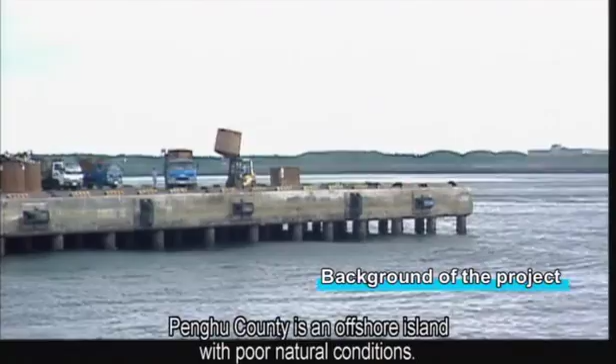Penghu County is an offshore island with poor natural conditions. The lack of natural water resources affects the sourcing of city water, resulting in livelihood water source deficiency, which causes inconvenience in the daily lives of Penghu residents.

Penghu has a flat terrain that lacks rivers and mountains, and a climate model in which annual precipitation is far lower than the amount of total evaporation. Reservoirs have a small watershed and a short rainwater collection time. In a dry year that lacks plentiful rainfall, reservoirs run low with insufficient water storage, and water shortages are likely to occur.

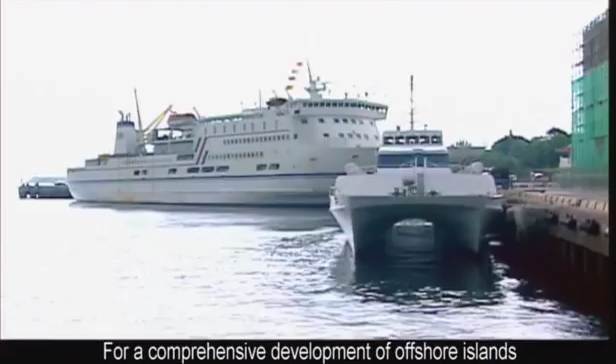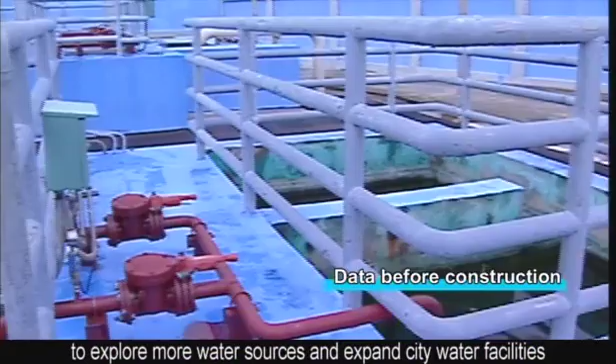For a comprehensive development of offshore islands aiming to improve water quality for residents' daily use, as well as for corresponding to the increase of water demand resulting from tourism developments, it was a priority mission for the Taiwan Water Corporation to explore more water sources and expand city water facilities to provide an adequate supply of quality city water when the original facilities are at full capacity for both water production and water distribution.

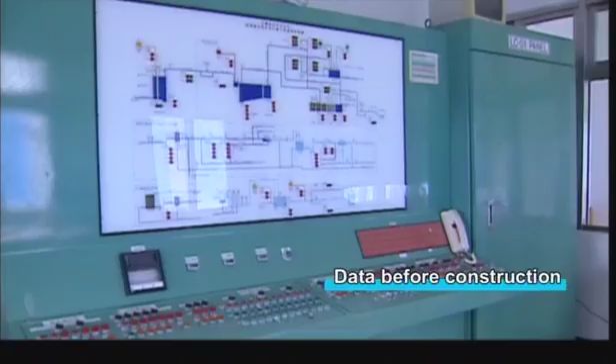Desalination plants have become an emerging water resource, equally important to traditional water sources in many developed coastal countries, offering an effective solution to mitigate or eliminate the unbalanced supply and demand.

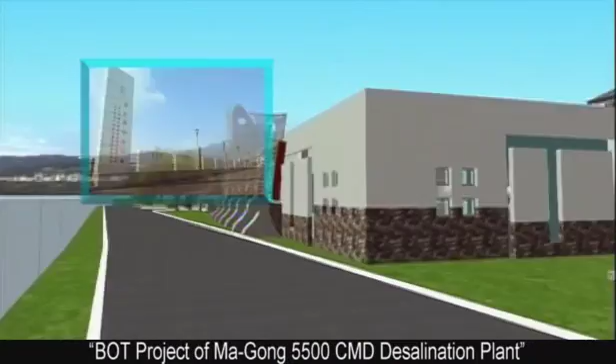In order to resolve the present insufficient water supply in the Penghu area, the Taiwan Water Corporation decided to build the BOT project of Magong 5,500 CMD desalination plant to stabilize the water supply by way of desalination, increasing the amount of clean water and capability to regulate the supply corresponding to quality fluctuations in the source water.

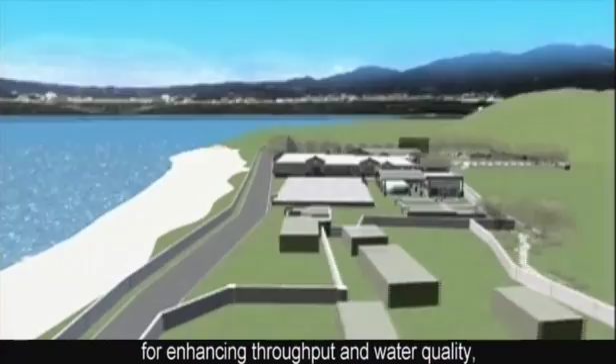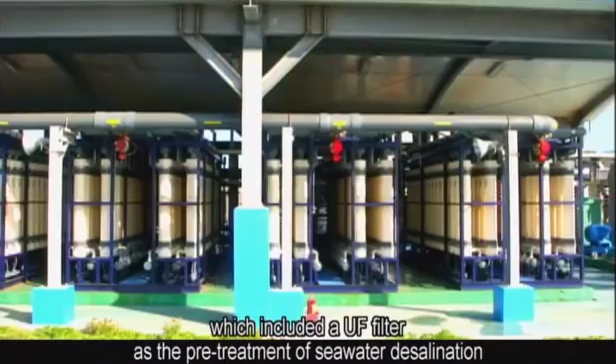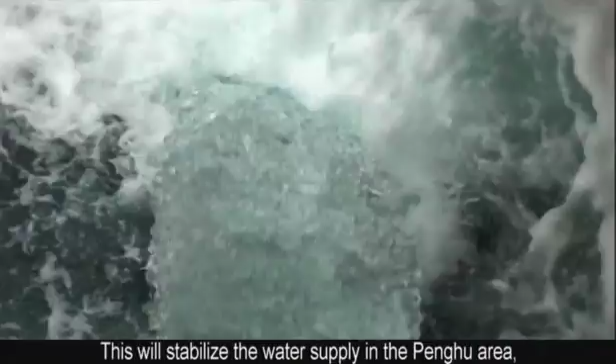Putting aside cost considerations, for enhancing throughput and water quality, Chinfu Water Resource Company Limited, a participant of the project, selected one of the first-class desalination systems in the world, which included a UF filter as the pre-treatment of seawater desalination, thus offering a steady yield. This will stabilize the water supply in the Penghu area, providing a safety standby load and achieving smooth deployment of the source water in the area as well.

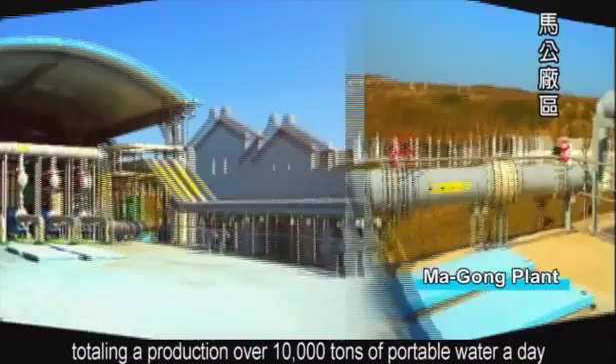Located at Magong City of Penghu County, the project covered both the Magong plant and Wangan plant. A new 5,500 CMD system was constructed at the Magong plant, together with the refurbishment of a 7,000 CMD system, totaling a production of over 10,000 tons of potable water a day. A 400 CMD system was refurbished at the Wangan plant, providing 400 tons a day.

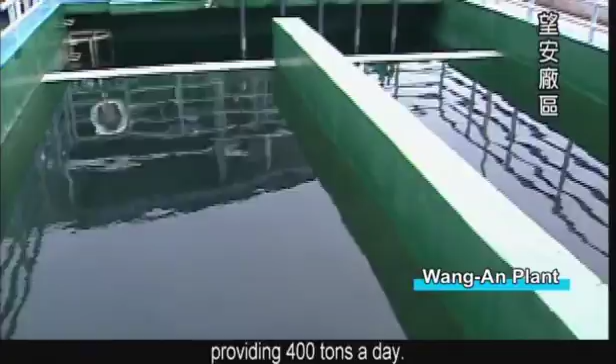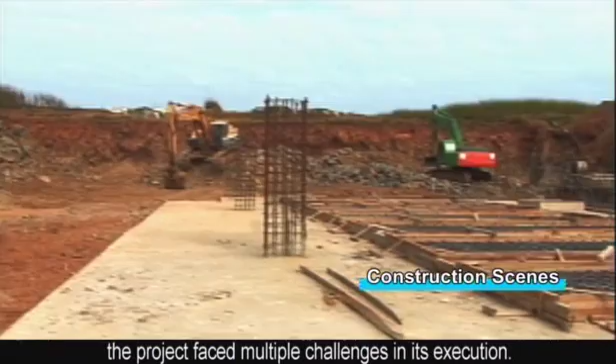Since Penghu has special geological and climatic conditions, the project faced multiple challenges in its execution. The Penghu Islands, including the plant area, are comprised of a basalt formation that is hard and rigid. When excavating the foundation, there was only 1 to 2 meters of topsoil topped up by basalt underneath. The excavation was therefore mainly carried out by breakers in combination with power shovels.

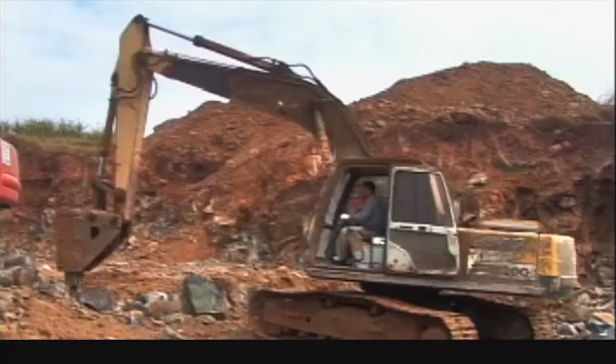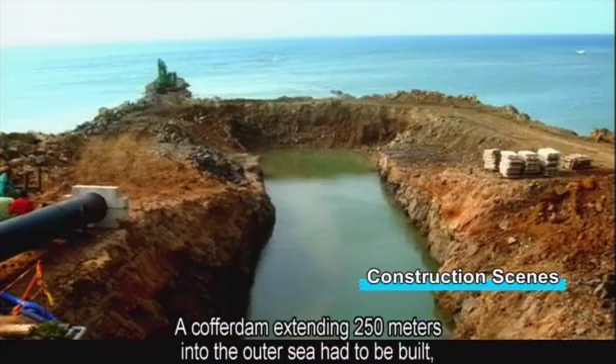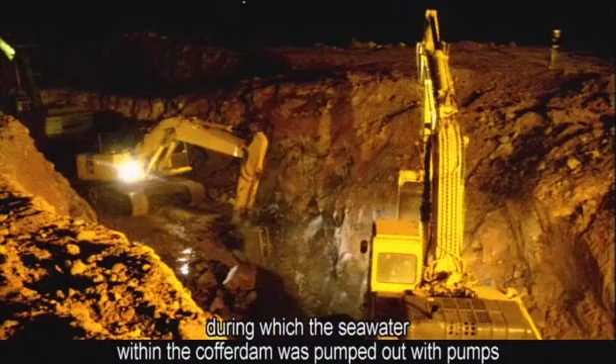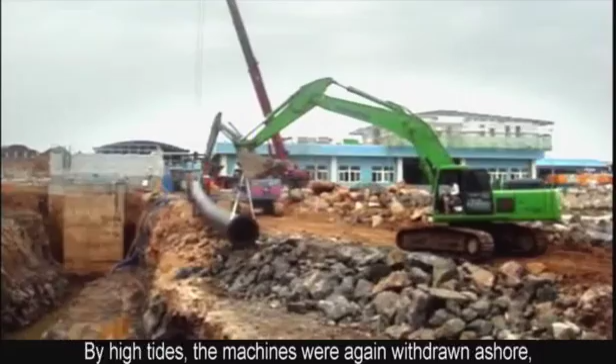Since the plant area has a shallow seafront, working barges for laying the seawater piping were unable to approach the seashore. A cofferdam extending 250 meters into the outer sea had to be built so as to utilize the ebb tides 2 times a day, during which the seawater within the cofferdam was pumped out with pumps in order for the construction machines to carry out excavation on the seabed. By high tide, the machines were again withdrawn ashore, thus cycling the excavation work.

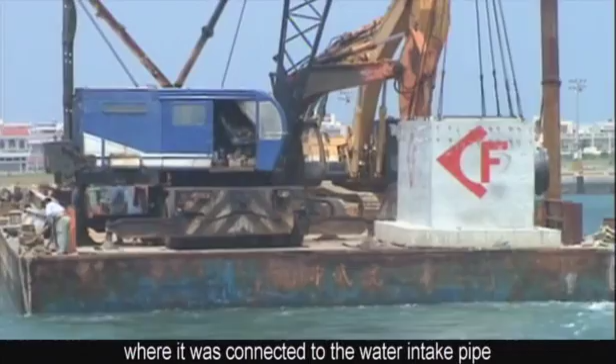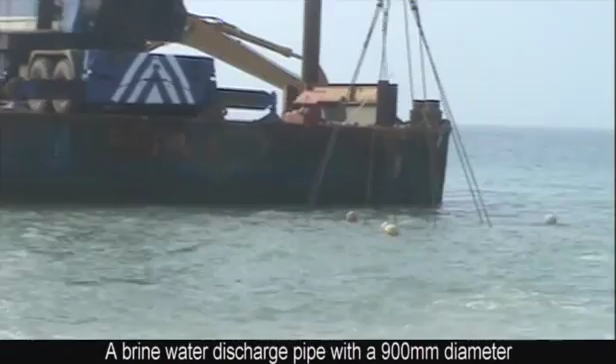The offshore location for laying the water intake structure was first excavated by excavating machines that were carried by a barge to the location. Then, the intake structure was carried by the barge from the wharf to the installation location, where it was connected to the water intake pipe, 1 meter in diameter and 320 meters in length, and sunk into the seabed. A brine water discharge pipe with a diameter of 900 millimeters and a length of 1,200 meters was laid extending offshore. All maritime works were carried out with protecting marine ecology the first priority.

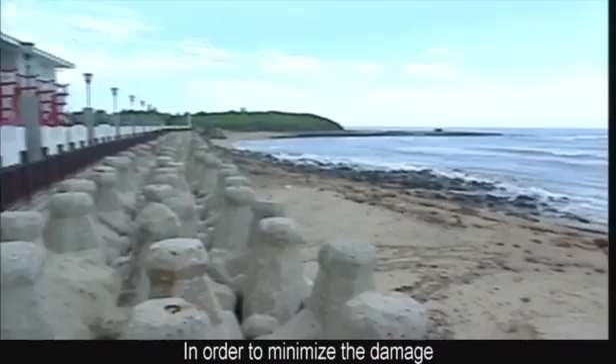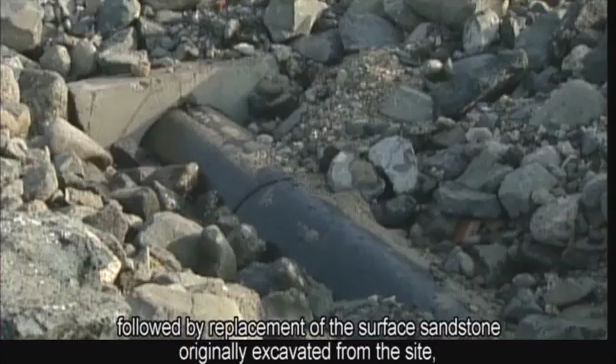In order to minimize the damage to tidal flats and rocky reefs on the south side of the plant, the excavation work was kept to a minimum. To prevent the pipeline from being struck by wave breaks at the tidal flat, a duct was excavated to accommodate the pipeline. After laying the pipeline, the duct was grouted with high-strength concrete to protect the pipeline, followed by replacement of the surface sandstone originally excavated from the site, so as to restore the original terrain of the seashore.

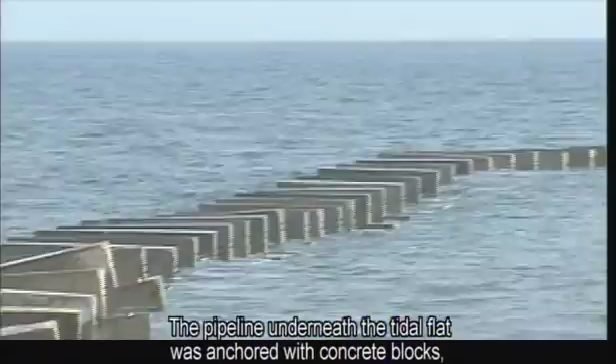The pipeline underneath the tidal flat was anchored with concrete blocks to minimize disturbance to the seabed formation.

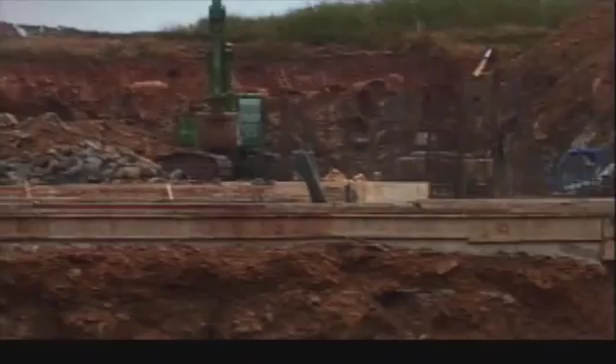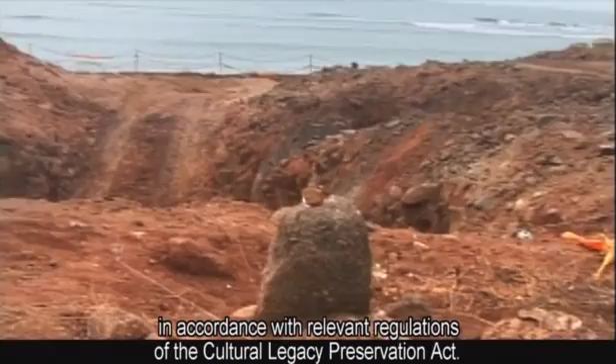In the aspect of cultural legacies, archaeological findings and antiques discovered within the excavation area were all handled in accordance with relevant regulations of the Cultural Legacy Preservation Act. The Chunful team retained an archaeology team led by Professor Liu Yi Chang of the Academia Sinica and Professor Pan Yinghai of National Jinan University to carry out an archaeological survey at the site of foundation excavation and underwater pipeline laying.

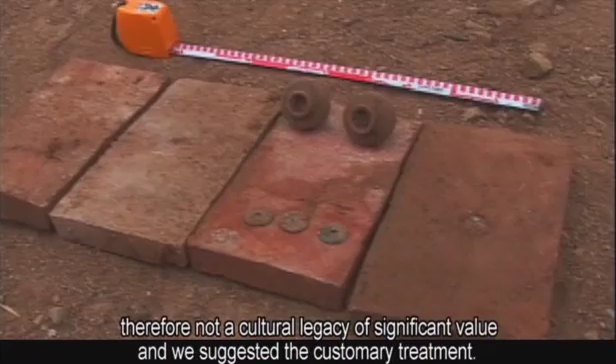Upon finding a grave like this, we made preliminary verifications based on cultural legacy standards. We judged it was a burial site from a period between the end of the Qing dynasty and the Japanese occupation. Therefore, not a cultural legacy of significant value, and we suggested the customary treatment.

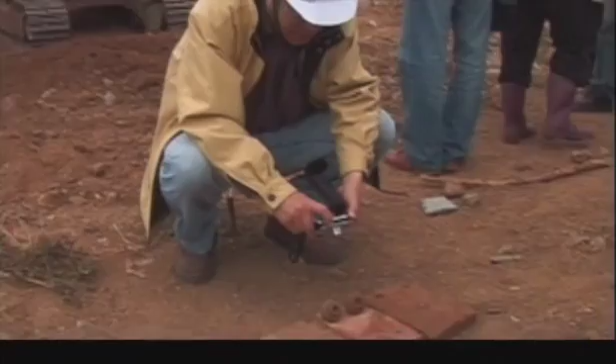With the process of cultural legacy, we stopped, recorded, made survey and photographs, so that people understood that we did not destroy any cultural asset or antique of folkloric value during the process of constructing the desalination plant.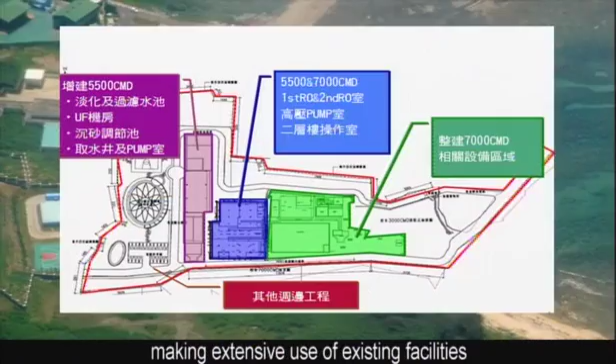A compact spatial design based on optimal land use provides a smooth and convenient process sequence, as well as flexible scalability in the future, making extensive use of existing facilities and natural terrain conditions for accomplishing the most economical desalination plant on Penghu Island.

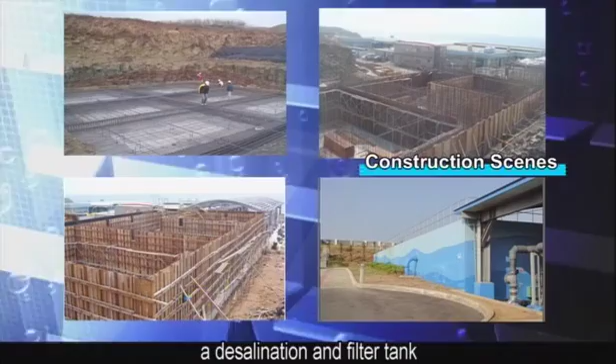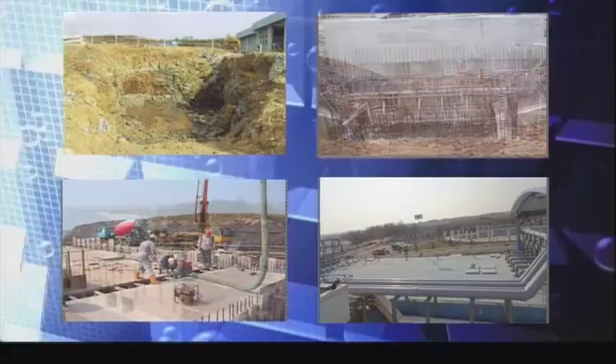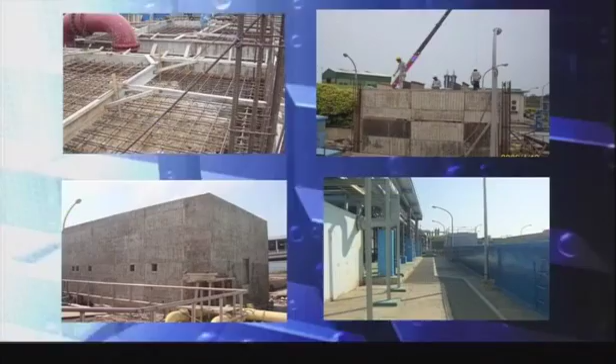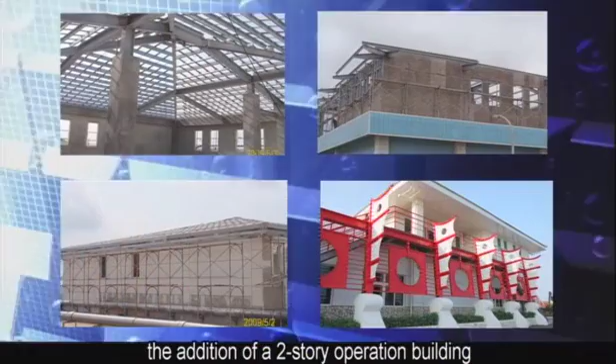The project consists of the construction of a 5,500 CMD water intake pipeline, a brine water discharge pipe, a desalination and filter tank, UF equipment room, sedimentation and regulation tank, water intake wells, and a pump room. The refurbishment of the 7,000 CMD treatment plant included a first RO room and a second RO room, the addition of a 2-story operation building, and the refurbishment of a 400 CMD plant.

The construction of a desalination plant requires effective integration of mechanical and electrical devices and water quality instruments, as well as graphic control systems to achieve stabilized operation of the desalination mechanism and reliable process units.

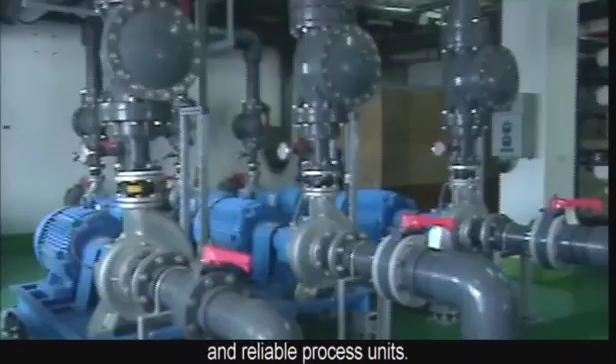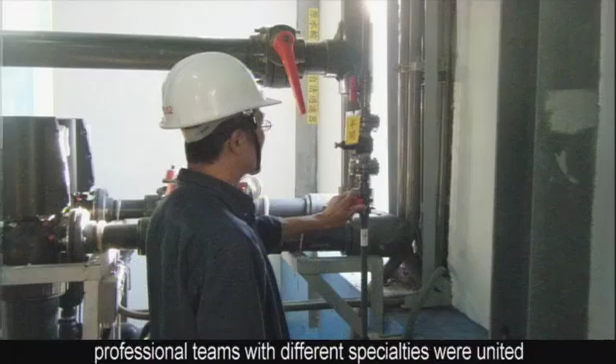During the construction period, professional teams with different specialties were united and engineering quality was controlled via a comprehensive quality control program so that construction tasks were engineered to the specified quality requirements. On completion of each unit, test runs were carried out to ensure that the specified quality of the desalinated water was achieved.

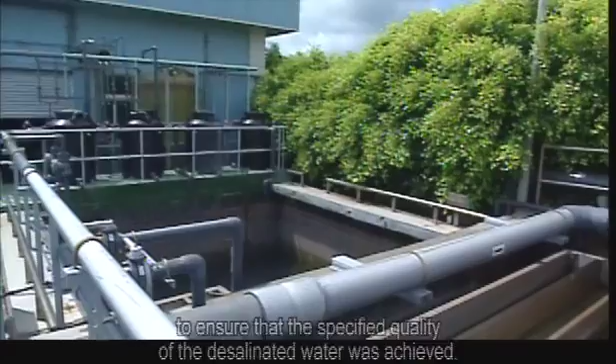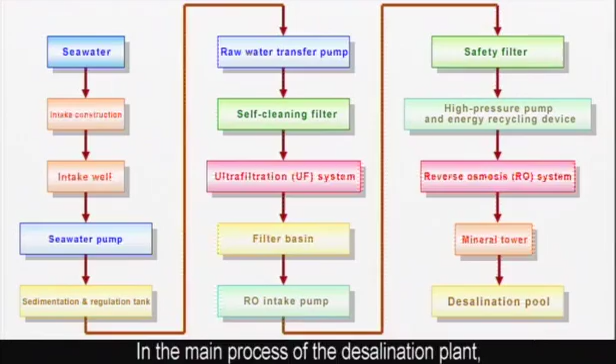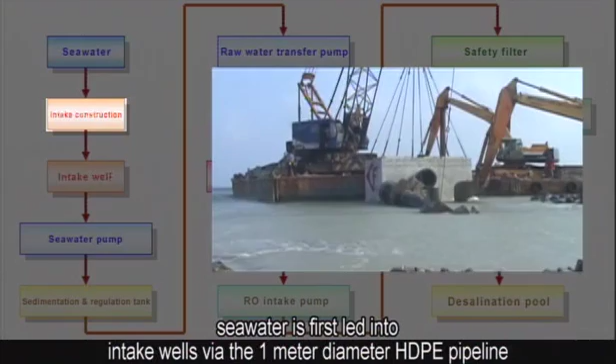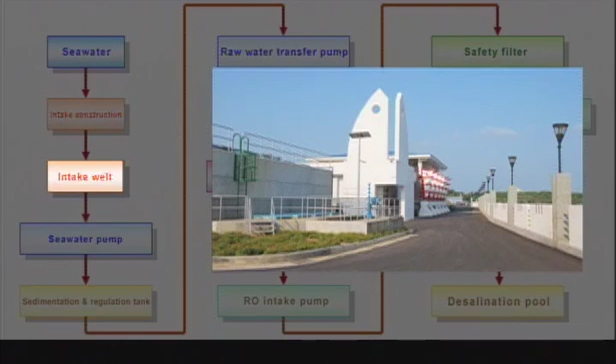In the main process of the desalination plant, seawater is first led into intake wells via the 1-meter HDPE pipeline from the offshore intake header installed 320 meters south of the plant. Seawater is transferred from the intake wells to the pump room, where seawater pumps pump the raw water into the sedimentation tank, where large gravel is then separated out by sedimentation.

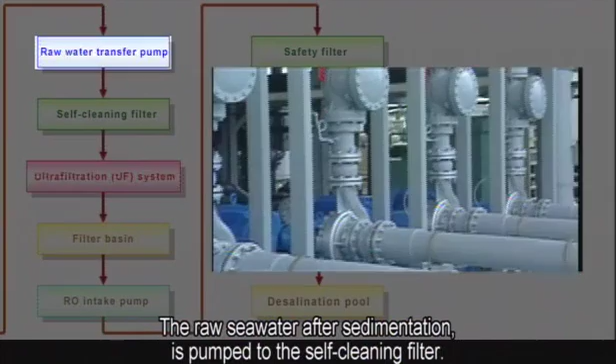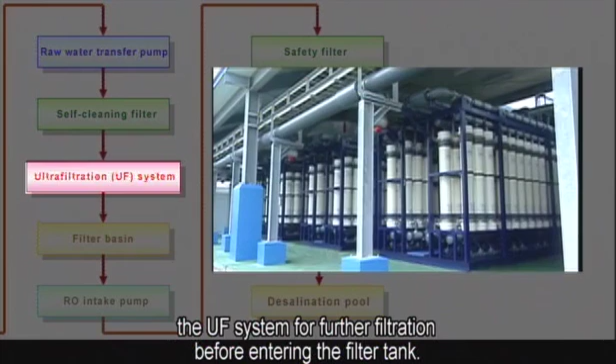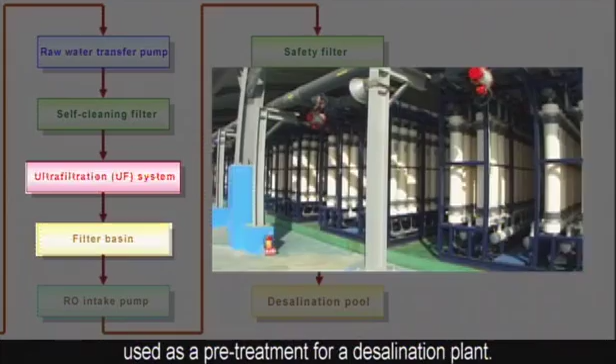The raw seawater, after sedimentation, is pumped to the self-cleaning filter, after which it passes through the UF system for further filtration before entering the filter tank. This UF system is the very first ultrafiltration equipment in Taiwan, used as a pre-treatment for a desalination plant.

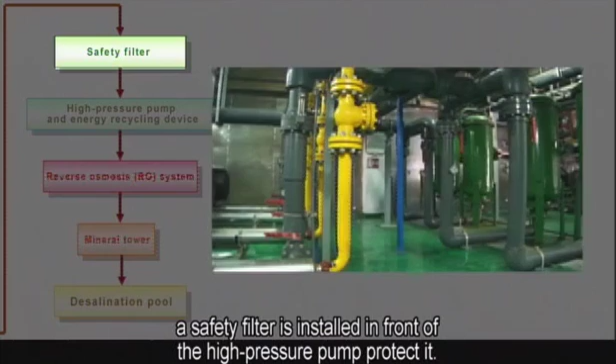The filtered water is then pumped to the high-pressure pump via a one-stage RO intake pump to ensure the filtered water entering the high-pressure pump is free of silt or any other impurities. A safety filter is installed in front of the high-pressure pump to protect it. After the filtered water passes through the safety filter, 40% is pumped out at a pressure of 60 to 65 kilograms per square centimeter.

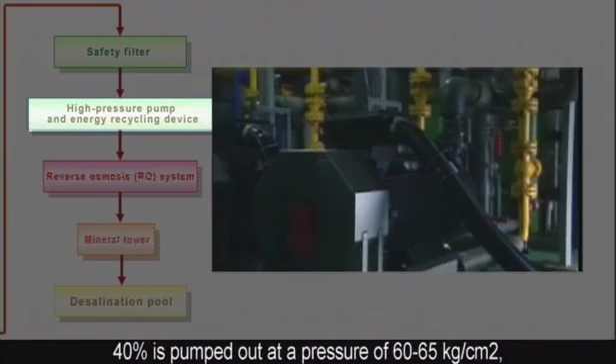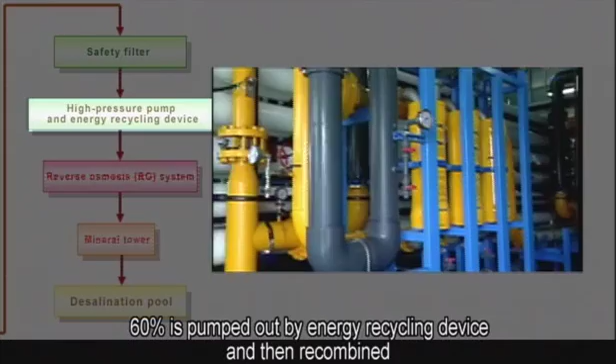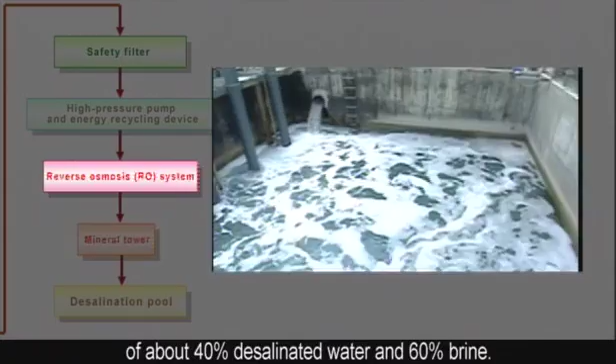60% is pumped out by energy recycling device and then recombined into the core unit of the desalination plant, the RO system, which has an output of about 40% desalinated water and 60% brine. The discharge pressure of the brine can be reclaimed via an energy recovery device and boosting pump to repump the filtered water so as to reduce energy consumption.

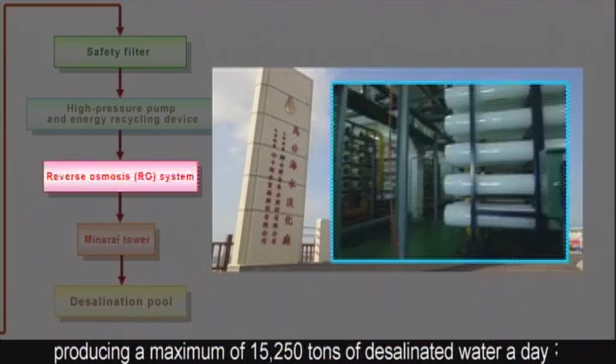A total of 6 RO units are installed in the Magong plant, producing a maximum of 15,250 tons of desalinated water a day. 2 RO units are installed in the Wang'an plant, with a daily production of 800 tons of desalinated water.

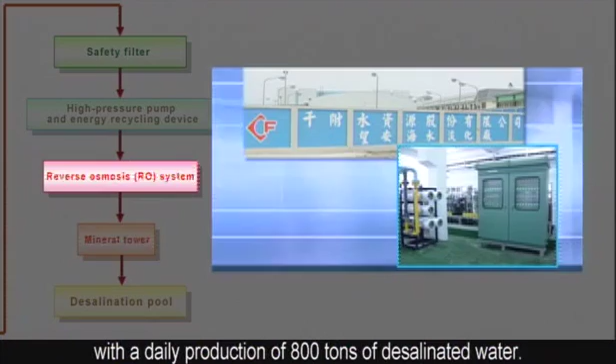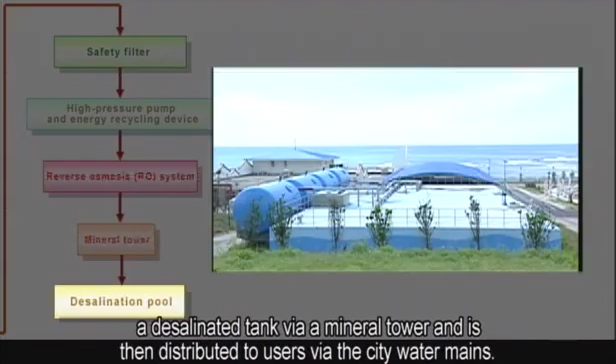Finally, the desalinated water enters a desalinated tank via a mineral tower and is then distributed to users via the city water mains.

Furthermore, in order to ensure a steady yield of high-quality desalinated water, as well as the safety of users, the entire water production system is monitored and controlled by precision instruments. There is a comprehensive quality surveillance system in addition to a water quality analysis laboratory where desalinated water is tested regularly to ensure every water production sector is pollution-free.

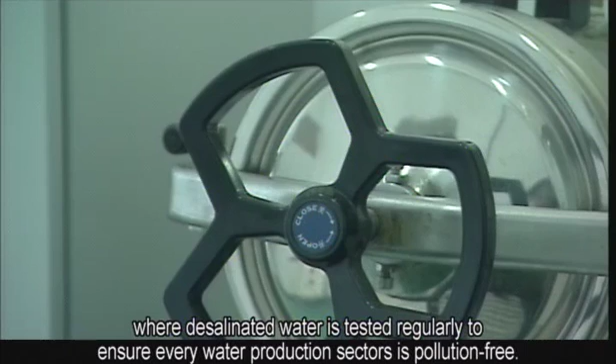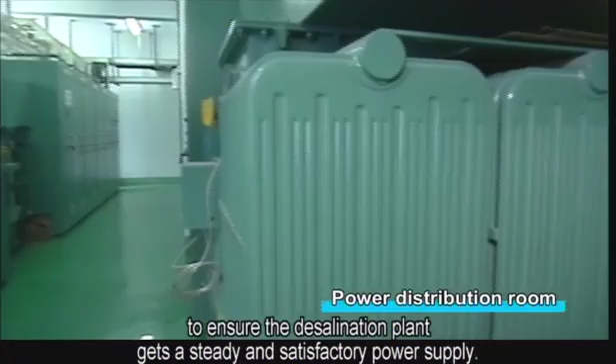The power substations are equipped with quality power distribution devices to ensure the desalination plant gets a steady and satisfactory power supply.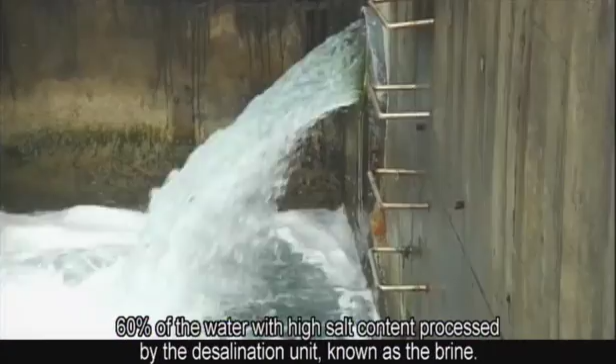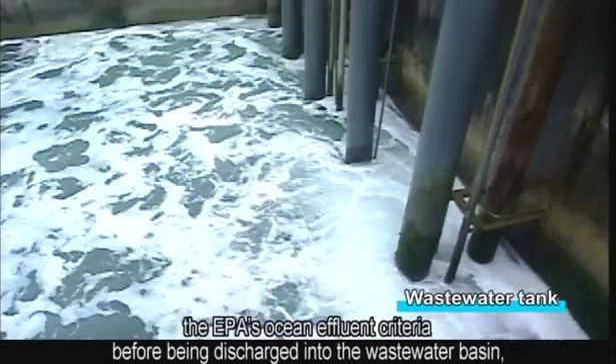60% of the water with high salt content processed by the desalination unit, known as the brine, is collected and further treated to meet the EPA's ocean effluent criteria before being discharged into the wastewater basin, where the wastewater is pumped by the effluent pump to the offshore diffuser, 1,200 meters away from the plant, via an HDPE discharge pipe, 900 millimeters in diameter, and then discharged into the sea.

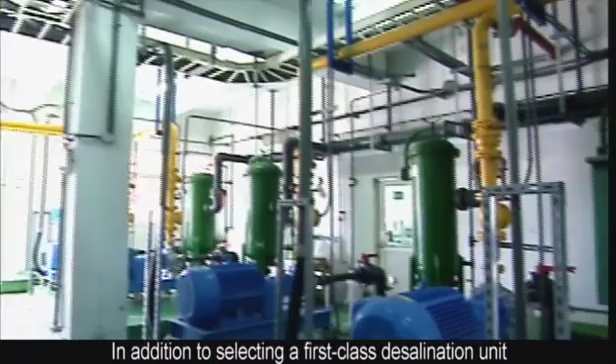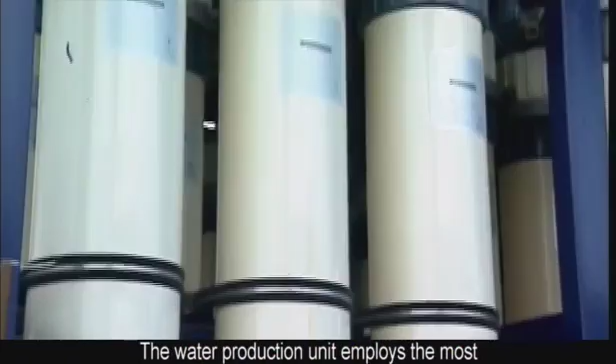In addition to selecting a first-class desalination unit for providing a stable fresh water supply with improved quality, the project also aimed to protect the environment. The water production unit employs the most advanced energy recycling device in the world for effectively reducing energy consumption. The plant peripheral is also complete with streetlights powered by wind and solar energy.

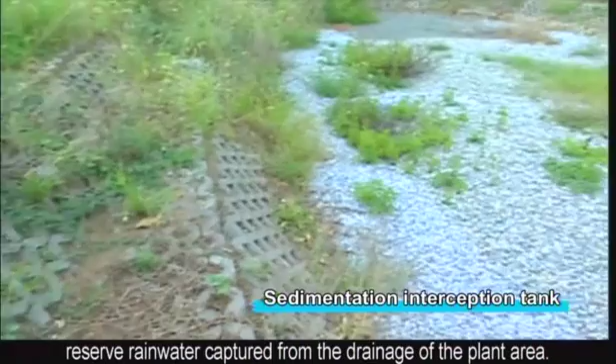A sedimentation interception tank has been provided to reserve rainwater captured from the drainage of the plant area. Rainwater is settled to remove the sand. It overflows into the rainwater collection tank underneath the parking lot and is used as a water source for the spray irrigation system used for greening the entire plant.

When we mention Penghu, we think of sunshine, sailboats, waves, and people playing in the sea. The plant is therefore designed with a large number of local characteristics, such as reproduction of traditional tribal villages with external walls decorated with traditional gables.

Since Penghu has limited sources of architecture materials, it is vital that a traditional structure use local materials. That is why Laogu stone, a wall decoration using local stones, dominates the architecture of the plant.

To convey the collective characteristics of leisure, romance, and the dynamic energy of Penghu, sails made of perforated plastic board were used to reveal the image of the brave who stood tall against the seas. However, the streamlining was gentle and smooth, suggesting a spirit that blends rigidity with softness, which fully complies with the island characteristics of Penghu.

Trees are arranged in open spaces within the plant. Bushes fill in the spaces. Ground-covering plants are further used to cover any exposed soil, forming a three-dimensional plantation comprising high, medium, and low vegetation layers, not only blending the plant with natural ecology by providing a habitat for insects, birds, and small wildlife, but also creating scenic landscaping within the plant.

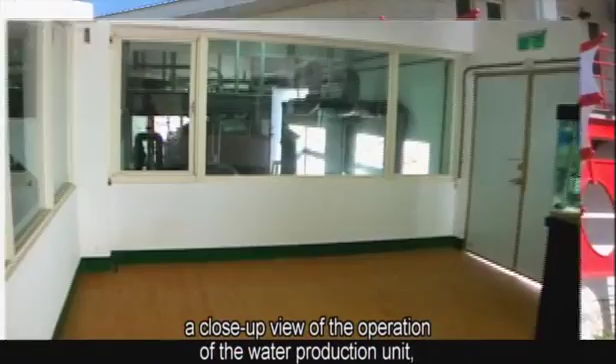The plant also acts as a model that functions as a location for education, leisure, and sightseeing activities. The briefing room, equipped with audio-video facilities, provides first-time visitors with comprehensive knowledge of desalination procedures, as well as the importance of water resources. Observation platforms are provided so visitors can get a close-up view of the operation of the water production unit, with an emphasis on water conservation.

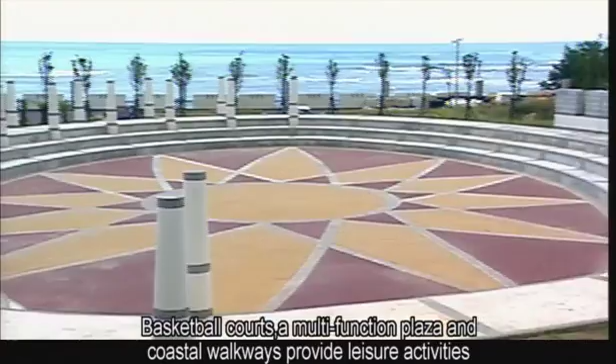Basketball courts, a multifunction plaza, and coastal walkways provide leisure activities other than plant tours for neighboring residents or tourists. Finally, the main function of the plant is to provide a stable water supply, improved water quality, in addition to employment opportunities for the community and multifunction spaces for education, leisure, and tourism activities. Most importantly, the plant serves as a reminder for us to cherish our water resources.

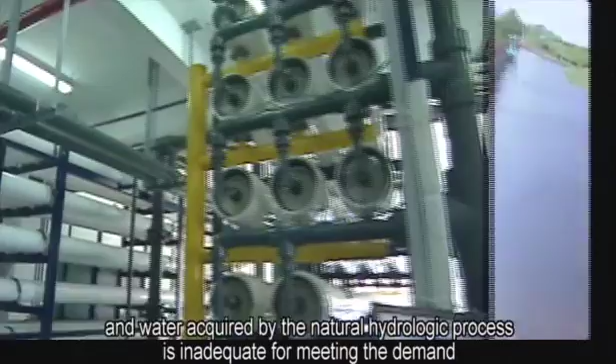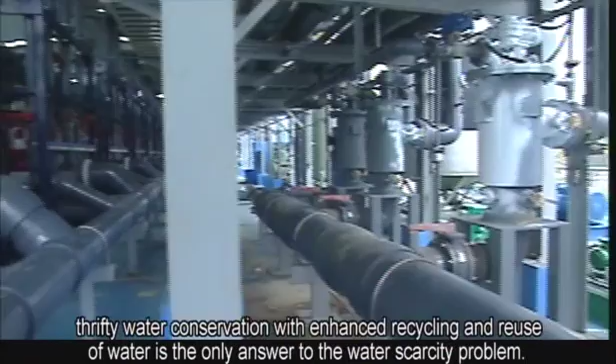Penghu lacks water resources, and water acquired by the natural hydrologic process is inadequate for meeting the demand. In addition to the expensive desalination project adopted by the government, thrifty water conservation with enhanced recycling and reuse of water is the only answer to the water scarcity problem.

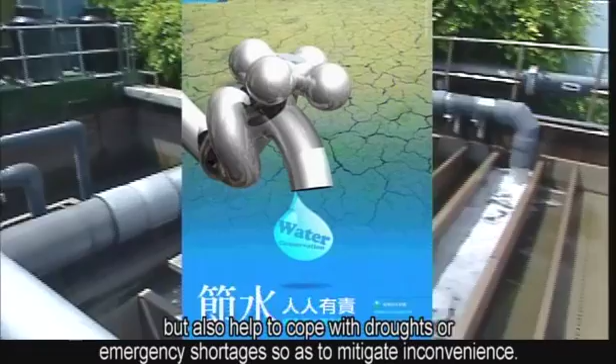Thrifty water use and wastewater recycling not only compensate for the deficiency of water sources, but also help to cope with droughts or emergency shortages so as to mitigate inconvenience. Effective and continuous recycling of water ensures sustained development of our society and economy.